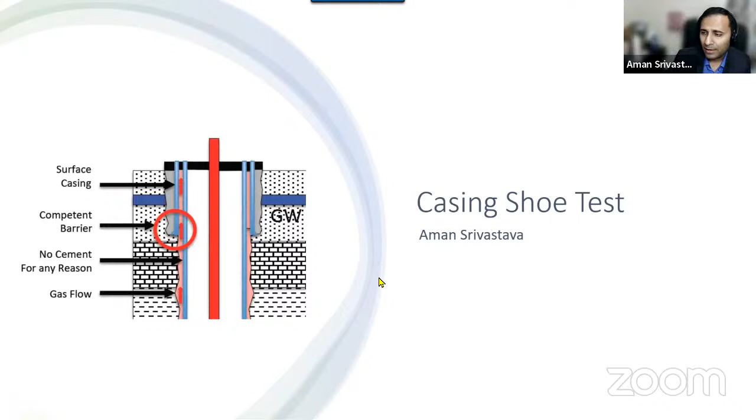Okay, so casing shoe test. The way I'm going to do this entire thing today may take like 30-40 minutes, I think. I have slides here. I'll be going over this agenda, but I don't really care about the agenda because I'll be walking you through how we do a shoe test, what is the reason, and what are the things involved in it. And I'll be doodling along as I go, on the slide and on one of my OneNotes as well. So let's start with this.

Casing shoe test. Now assume that you guys have been having this series of lectures where you must already be familiar with the cementing and casing terms that we are using. Now, what is a shoe test? Before we go toward the shoe test, we first need to understand what is a shoe, why do we test, and what is a shoe test. So what is a shoe? Here is the casing shoe, what you see on the left-hand side.

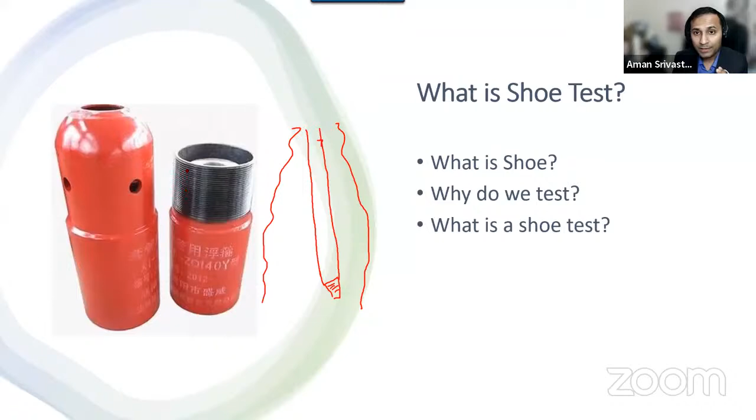Then what's the point of having this? I mean, if you drilled a hole like this and you are told to lower an open-ended drill pipe into it, that's totally fine. You can run it open-ended, you can have threads at the bottom, and nobody cares. But why do we add this casing shoe at the bottom? There are mainly two reasons why we do this. Number one is this has an NRV at the bottom.

Sorry, I'll write it here. NRV, that means non-return valve. So it allows you to flow anything into the casing and outwards into the open hole, but it would not allow you to pump it backwards. So that's the first reason of why you have this casing shoe.

The second is you can see this is a rounded bottom. Now, whenever you drill a hole, you might be drilling a hole, let's say 17.5 inch, and the casing you lower is a 13.38 inch casing, which is quite big. So if you have such a big steel pipe going in, which is extremely stiff in nature, it is very likely that these threads or the end of this pipe may get lodged on the side of the open hole that you have drilled.

So that's why we put a casing shoe at the bottom, which is rounded in nature, which kind of guides your entire casing all the way to the bottom. So if there are tiny ledges or bumps, you just smoother through it. It slides through the entire hole. Now you have this rounded thing right here, and you have an NRV right here.

Now there is another float collar as well. We put it up here. We call it a float collar, which is shown right here. And it also has an NRV in it. And the one or two casing joints between your casing shoe and the float collar are called the shoe track.

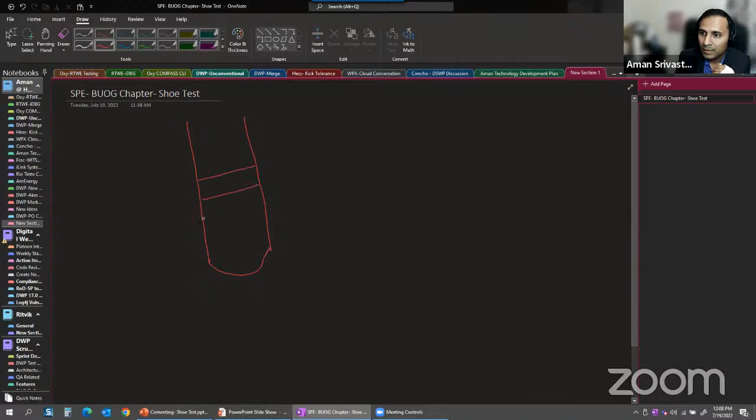So if I draw, let me move here. This is much better now. So if I draw a casing string, you will have a casing shoe at the bottom, and then you will have a float collar, one or two joints above. And this part is called the shoe track. This is the float collar. This is the casing shoe.

Now, when you lower this casing shoe into the hole, let's say I'm going to draw a hole, and I'm going to draw a vertical hole just for simplicity's sake. We take a casing, we come down all the way to here. This is the shoe. All right, so we have drilled till this depth, and we are like 1 or 2 feet above the bottom, and we have this thing right here.

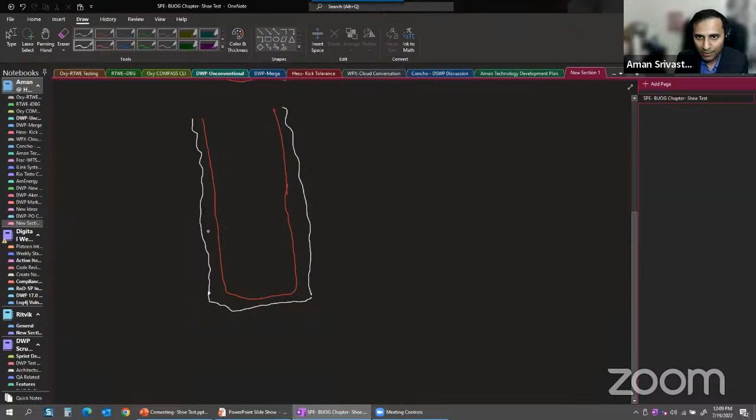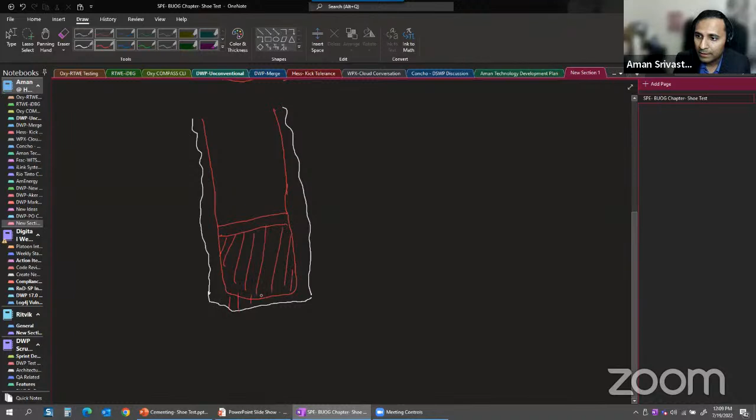Now, as soon as I reach the bottom, I'm going to start circulating so that I am sure that the mud is conditioned before I cement it. For cementation, I think that it is part of a series. If I'm not wrong, you guys have lectures on how primary cementation happens. But anyway, we drop plugs and the cement is filled in the shoe track and in the entire open hole till whatever depth we want.

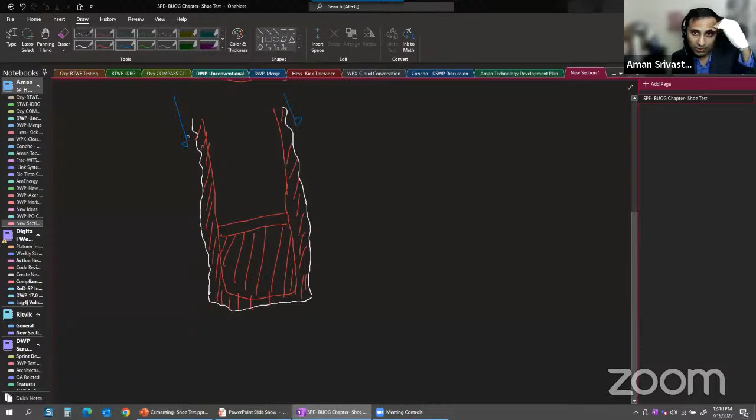So it could be all the way to the surface, or it could be till isolating any zone of interest that you want. Or if you have a previous casing right before that, you can actually cement only to that casing level. You don't need to bring it to the surface. Well, that's fine. We are talking about shoe track here. So I have my casing in the hole. My casing has been cemented.

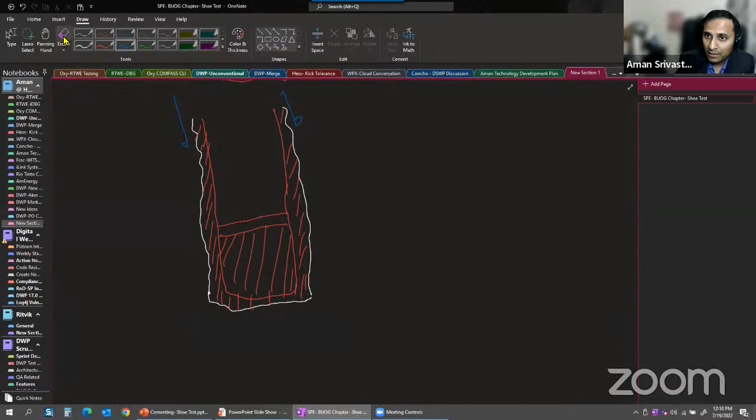Now, why do I need to test this shoe? What's the point of testing this shoe? Now I know this is the shoe, but what's the point? The point is that I'm going to start drilling out this entire thing. So if I take an eraser and I start drilling, I drill out the float collar. Now these all things are drillable. So what you saw in this slideshow, obviously not this metal part, but you can drive a drill bit through this entire float collar and this entire shoe.

These are usually made of cement, a little bit reinforced cement, and plastics. And you can even see them when they come to the surface. You can see big pieces of plastics coming to the surface, and these are drillable materials. So you can drill them with just a regular bit. So we're going to drill out this shoe, and we're going to drill out this part.

Now my entire casing is open, and this part now, which is right at the communication of the casing and this last formation that I drilled, is called the shoe. Now my new hole is smaller in size. Obviously, it's smaller in size like this. So this will continue to be called a shoe.

And you will hear this term very commonly used in the drilling industry whenever you guys work as drilling engineers: are we above the shoe? Above the shoe means, is your drill bit inside this shoe, which means your drill bit is inside the casing. Because this is a casing, it's a solid steel pipe, so nothing will happen. You can keep it there for days, no damage done, you won't get stuck. But if you leave it here, you can get stuck.

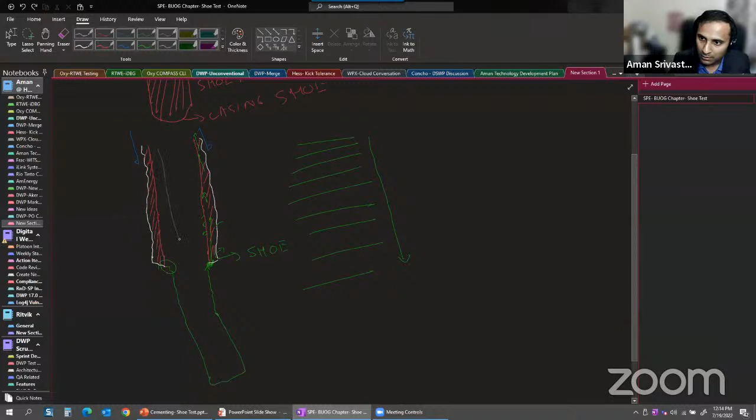All right. So now we know what the weakest link is. If you have a weakest link, you have already cemented that, so there's nothing more you can do about it. So let's test it out. Let's ensure that this weakest link is strong enough to hold us till we reach our next target depth. If I zoom out and draw this, till I reach this target depth, finish this up, and lower another joint of casing all the way to the bottom, with the casing shoe at the bottom again, and cement it all the way to the top.

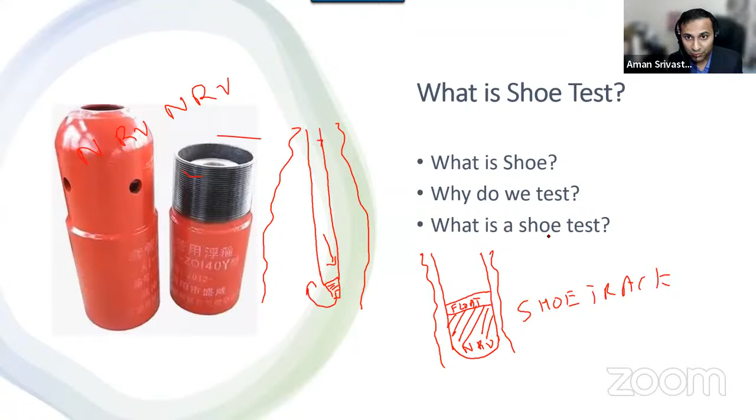Now I'm safe. Now I know that this is no longer the weakest link. The weakest link now becomes something else, the bottom part. So that is why it is important for us to test the shoe. Now the question comes in, what is a shoe test? So let's get to that question.

Now, what I'm showing you here, and I can share this slide with you, is literally the steps we take to conduct a shoe test. This is the step-by-step process we do at the rig site. And before I come to the question, why do we do the shoe test, I wanted to cover how you conduct a shoe test, so that later on you can see why I did this.

So if you're at the rig site and you get an order that we're going to conduct a shoe test, there are some pre-test preparations you have to do, and these things should be very clear to the drilling engineer, the rig site supervisor, the company man, or the tool pusher, whatever role you are playing. Number one, what is the test plan strategy? What are we going to test? Is it an FIT? Is it an LOT? I'll come to those points right after the slide. So ensure the test plan strategy is very solid before you even start with the test.

Ensure a blank P and V chart is available. Now, this could be something that you may not need, because nowadays any unit that you use, you have computers, they can plot everything for you immediately. So that's not required. But you know what? A pen and paper is much stronger than any computer in the world.

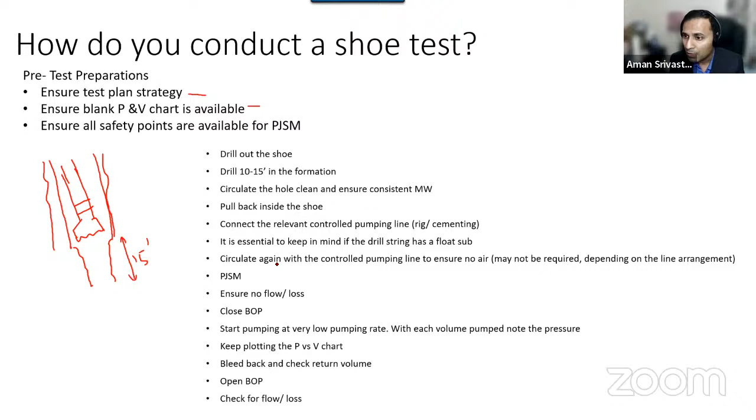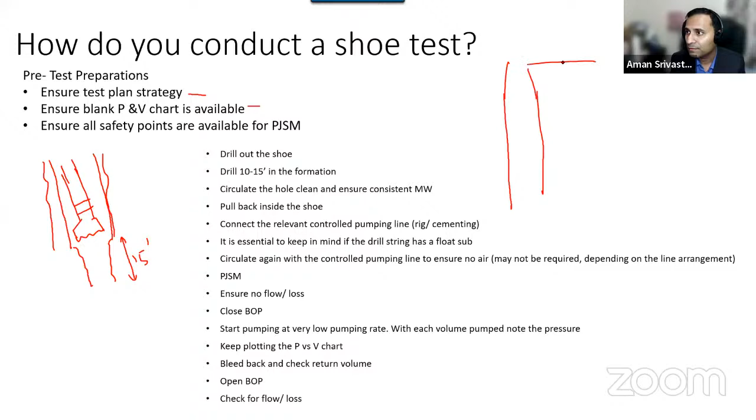It is essential to keep in mind if the drill string has a float sub. Now, this may not be relevant right now, but if your drill string has a float sub, you have to keep that in mind, because the pressure may not bleed if there's a float sub. You have to make sure you have bled off all the pressure. Anyway, circulate again with the control pumping line to ensure no air. So let's say this was your well that you drilled, and on the surface, you connected a pumping line. Earlier you had circulated and made sure no air is in here, but you have to make sure there is no air here as well.

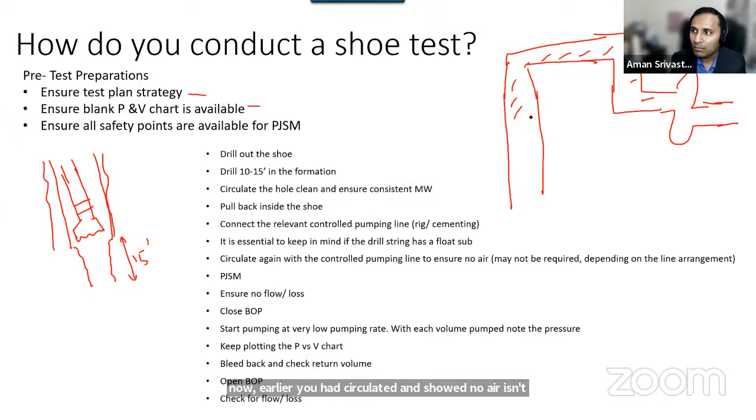Now, why is making sure there is no air in the system so important? It is because air is compressible. Air is extremely compressible. Actually, all fluids are compressible, but air is extremely compressible as compared to the drilling fluid that you are using. So if you have an air bubble, it will start getting compressed and you would not get a good result. So it's very important to know that there's no air in the system, but this depends on the line arrangement and how you have positioned it. So the pumps can sometimes control if there is any air or not.

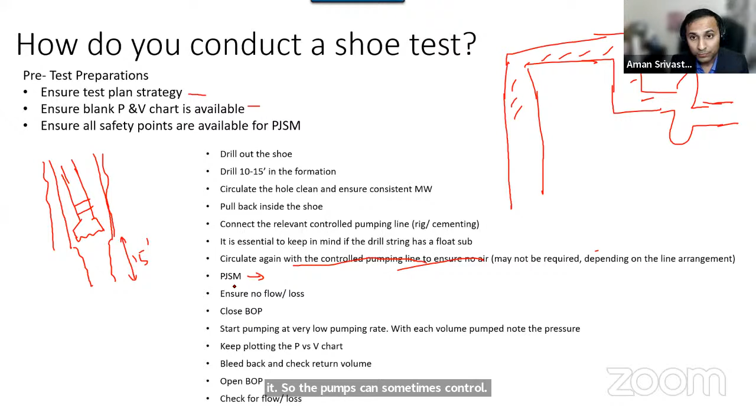You do a PJSM, like I said, pre-job safety meeting. At this point of time, you tell everyone what you're going to do. You ensure there is no flow. The well is not under self flow. You're not getting a kick, and you're not losing any fluid. The well is completely stable. You close the BOP. This is extremely important. You had a well, you are going to close the BOP.

So now you have shut down the BOP. The well is completely shut in. And now you start pumping at a very low pumping rate, very small pumping rate. And with each volume pumped, note the pressure. So again, like I said, you have a chart available with you.

You were at 0.0. You pumped, say, 0.1 barrels. You got some pressure. 0.2 barrels, you got some pressure. 0.3 barrels, you got some pressure. 0.4 barrels, you got some pressure. You keep on plotting that, and ensure that you're plotting this PV chart as you are pumping. You cannot wait for the test to get over and then plot this. It has to go on simultaneously.

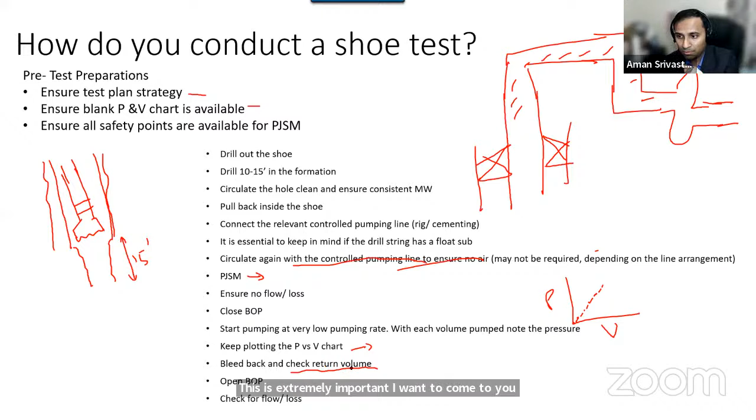You keep plotting the PV chart, you keep pumping, and once you have reached the success point where you say, okay, my test is done, you're going to bleed back the entire pressure and check the return volume. This is extremely important. I want to come to why this is so important. You have to check how much volume of fluid comes back to you. You open the BOP and then you check for flow and loss. You resume your operations. Easy peasy.

I know there's a lot of steps here, but actually all you're doing is you shut in the well, you pump some fluid into it, and you note down the P and V plot. You stop pumping, you bleed back, you start your drilling process. It's usually very smooth. It's usually very easy to do.

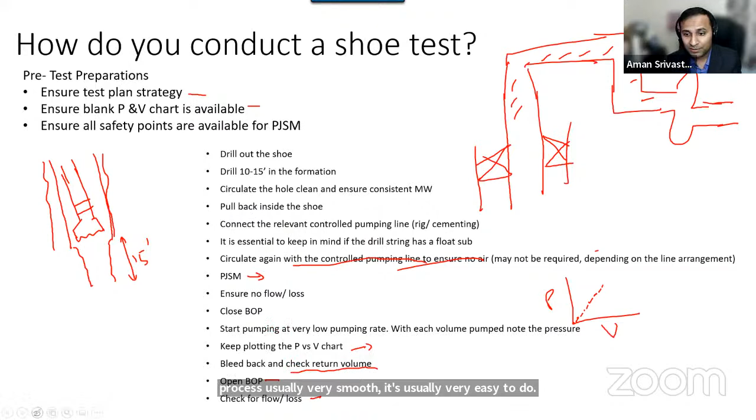Now, why are we doing this? You know how to do it, but the question comes, why did I do all these steps? So if you are on the rig side and you are plotting pressure versus volume, so you have volume right here and pressure right here. If you're plotting these two as you are pumping, like I said, you will start from 0, 0, and you will start plotting this line as you're going up. Now, look at this line. It's perfectly straight going up.

Right now, what is happening is you are doing a limit test. Some people call it limit test, or actually you are performing an FIT. FIT means formation integrity test. Because whatever volume you pump, the formation holds that volume, and the pressure starts increasing in the entire system, in the entire wellbore. So you are getting a formation integrity.

What is the integrity of a formation? How strong it can hold that pressure. It could be 200, 300, 400, 500 PSI. And that is where the formation strength is holding up for you. If you keep on pumping, there will be a point of time where it will start deviating. So this was supposed to be a straight line, which would have continued, but then you started deviating. This is the leak off test.

And unless you are plotting live, as you are pumping, you would never know when you reached LOT because you would just keep on pumping. That's why I told you it is very important to keep a P and V chart in front of you or keep looking at the computer screen to see at what point you deviated from that straight line. So right here, we deviated from the straight line. This is the LOT point, leak off test.

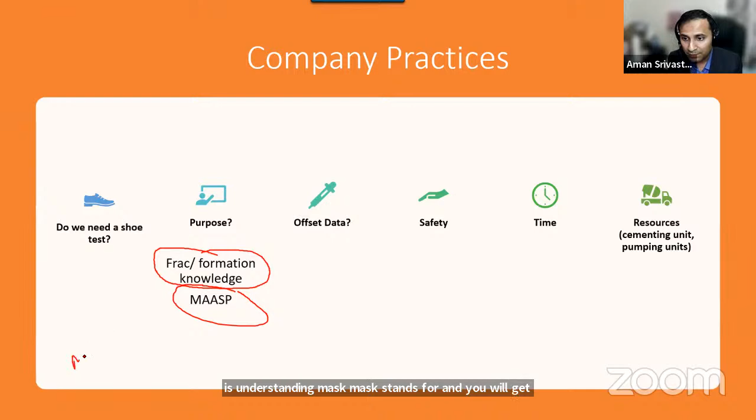MAASP stands for, and you will get this when you do any well control course, maximum allowable, sorry, my poor handwriting, annular surface pressure. Maximum allowable annular surface pressure. So what does it mean?

If I'm drilling right here, if I drilled this hole and I lowered a casing till this point, and I performed a shoe test, let's say 5,000 feet, I was using a mud weight of 9 ppg. I'm using API units here. Please pardon me if you're not familiar with it, but this is what I'm familiar with. So let's say I performed an LOT test, and I saw the point at which it started deviating was, let's say, 500 psi.

Okay, so I have got 3 input points: 5,000 feet vertical depth. This is the TVD. It's very important, note TVD. 9.0 ppg, that's the mud weight at which I conducted my shoe test, and 500 psi is my LOT value, leak off value. What does it tell me? It tells me that the bottom hole pressure right at the shoe when I was conducting the test was

0.052 times 5,000 times 9.0 plus 500. This is the hydrostatic pressure of the mud that was acting on it, and then plus 500. Okay. If I calculate this, should be quick enough. 0.052 times 5,000 times 9.0, 2340 psi, and let's simply add 500 to it, and 2840 psi. So we have 2840 psi of bottom hole pressure that was acting on this shoe, which tells me that this shoe can withstand a total bottom hole pressure of 2840.

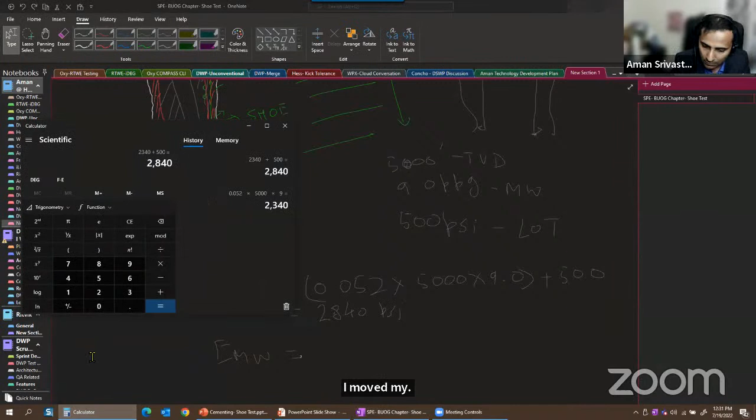What is the equivalent mud weight for that? What does it mean in mud weight? So it means that, oh, I'm sorry, I moved my, okay, there it is. So it means, 2840 divided by 0.052 divided by 5,000, 10.92 ppg of mud. So this means that my shoe can withstand a total mud weight of 10.92 ppg.

Now, this is very important for me, and this 500 psi is very important for me. It tells me that if I continue to drill this coming up section with the same mud weight, 9.0 ppg, my maximum allowable surface pressure is 500 psi. Whenever I'm recording the surface pressure, it should not go above 500 psi in the annulus. And why is it helpful?

Because if there is a kick, if there is a gas kick in the well I'm drilling, and the gas bubble is going upwards, the pressure on the surface will rise. And if it goes above 500 psi, I'm going to have a leak off at the shoe, which can lead to, you saw that, fracture breakdown. It can lead to creating a fracture. It can lead to propagating a fracture. You can end up having an internal blowout condition, which is not good. So it is very important for a drilling engineer to know what is your maximum allowable surface pressure. That's point number one. And it's also important for us to understand what is the equivalent mud weight, 10.92.

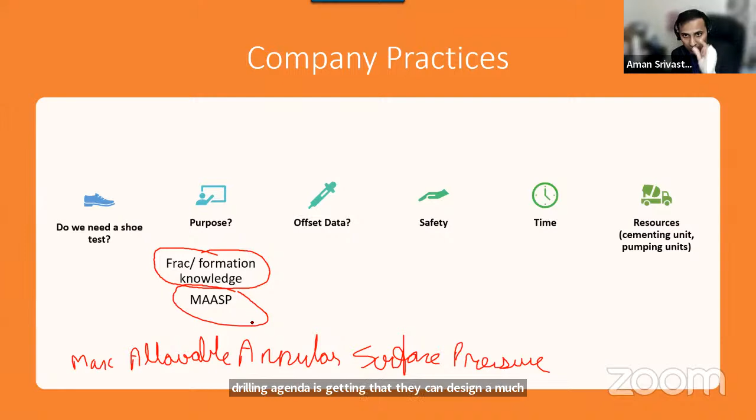Then comes offset data. You can ask the question that, hey, okay, I'm going to design it and I understand that you need frac formation and I need to know MAASP. But we have offset data. We have a well that was drilled maybe 100 feet away from this well. Why can't we take those FIT LOT values? You can. That's not a problem. You can take those values.

But there can be questions raised on it because nobody is seeing how the formation is behaving down there. You don't know what kind of overburden pressure, what kind of undulations you have in the formation. So it can get a little tricky just blindly following the offset data, but you can copy the offset data. That's not a problem. If you don't have any source of information, go for offset data. That's always allowed. Safety always goes here, MAASP value. So you need to know what is your maximum allowable annular surface pressure, because that's the safety thing. So the company practice can be, we want to be safe. So as much as possible, do the LOT, do the FIT values.

Now there comes time. Do you have time to do that? I know it sounds very silly. I've just told you the importance of doing a shoe test. Why is it so important? Why is it so critical? It's safety. But what about the time? It does involve time. It can take you maybe 1 to 2 hours to perform the shoe test, depending on how good or how fast the crew is. But in an offshore scenario where a drilling rig is charging $1.5 million per day, time is of the essence.

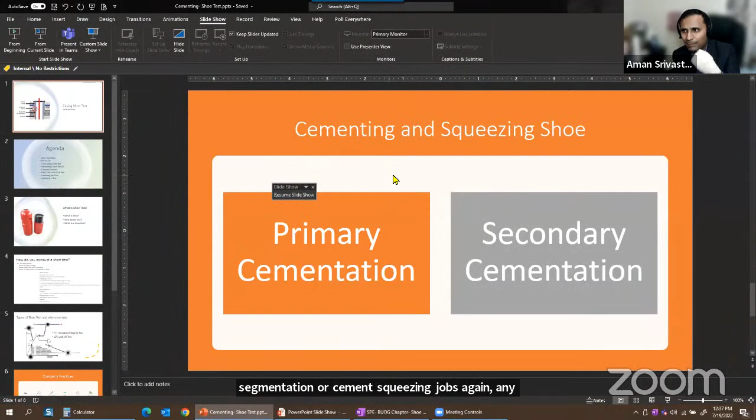You will do what is called a secondary cementation or cement squeezing job. Any cementation which happens apart from primary cementation is secondary cementation. So cement squeezing is secondary cementation. But trust me on this, secondary cementation, squeezing cement, they don't have a very good success rate. They don't.

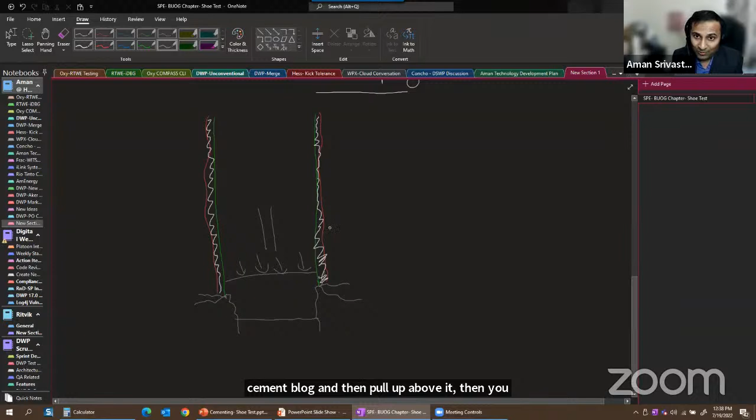So your best bet is you do this primary cementation in the best way possible, having the best quality of cement, having the tests done by the cementing lab again and again. Make sure you have done the right tests, right analysis, right mud weight, because secondary cementation may work. You can land a cement plug, pull up above it, and then pressurize above it. It may work, it may not work. That's always questionable. So the best way to do it is primary cementation.

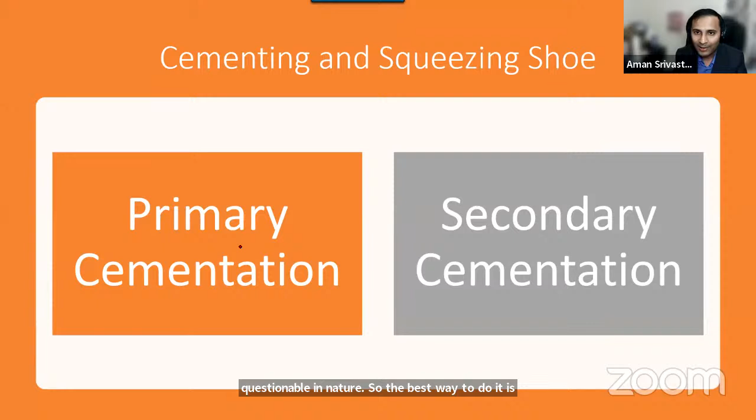I know a guy who even said secondary cementation works only in books, it never works in real life. You want your shoe to behave best, do a good primary cementation, do good planning on primary cementation. This is contingency, always contingency. Don't rely on this. But I'm not saying people don't do it. People do it very often. Sometimes there's no other option, so you will end up doing some secondary cementation. But again, the success rate might be a little less.

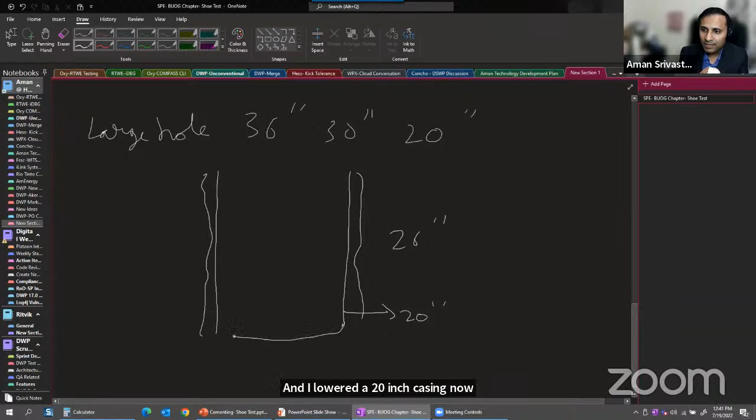And so like 36-inch or 30-inch or 20-inch casing. So I'm gonna make a big hole here, and you have a casing that goes down. So let's say I drilled a 26-inch hole and I lowered a 20-inch casing. Now, as per the primary cementation rules, what you're going to do is you will be having a float collar right here, and you will pump plugs, a bottom plug and a top plug.

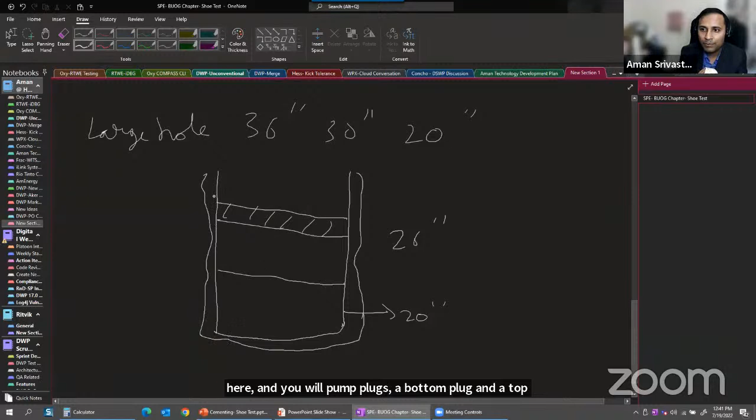And the plug will travel down and it will squeeze the cement and then squeeze it upwards, and this plug kind of like pushes all the cement down. It finally rests on top of the float collar, and you will have cement then filled out here and in the annulus. So it's kind of like a plunger, it pushes it downwards.

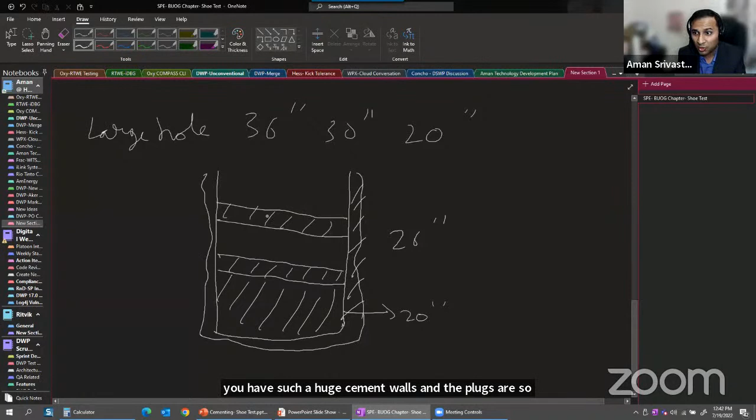But what happens with large casing is you have such a huge cement volume and the plugs are so big that sometimes it's not easy to get a good plug wiper job. This plug acts like a wiper, you know, you're wiping water off of your bathroom floor, so you squeeze it. But these plugs are huge. 20 inches is a big size.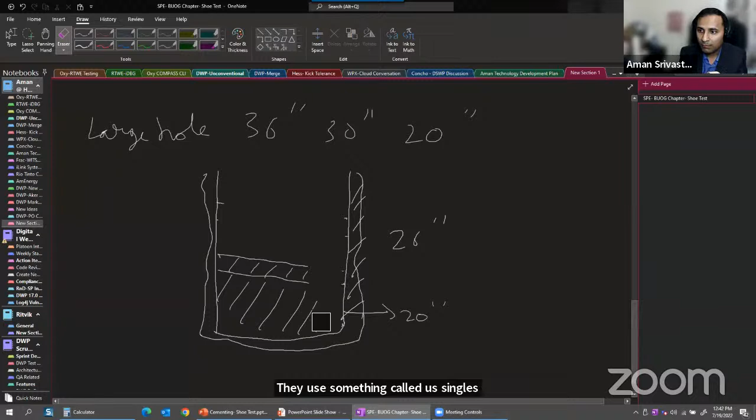So what they do, instead of going like this, they use something that's called a stinger string. And your cement shoe at the bottom is also special in that case. You cannot just use any cement shoe. It has something which is called a stinger or stab stinger, and you lower a drill pipe, just any regular drill pipe with a stinger at bottom. So this stinger is kind of like a funnel-shaped kind of thing like this.

And what it does is, let me see if I can do a little fancy thing here. All right, so it's going to go down and fit itself in, stab itself into that small protrusion this cement shoe already has. So as it goes down, it has rubber seals around it and it seals itself.

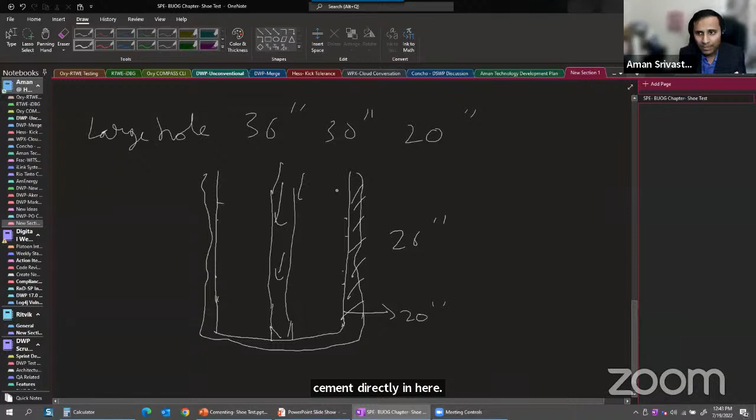Now you can pump cement directly in here into the drill string. Just pump the cement down this drill string. You don't need a wiper. You just keep pumping it, and it's going to come directly into the open hole and up into the annulus. And once you're done with it, you pull on the stinger because it's rubber. You just pull on the stinger and it comes loose. You flush the drill pipe with water so that you don't leave any cement in there, and that's it.

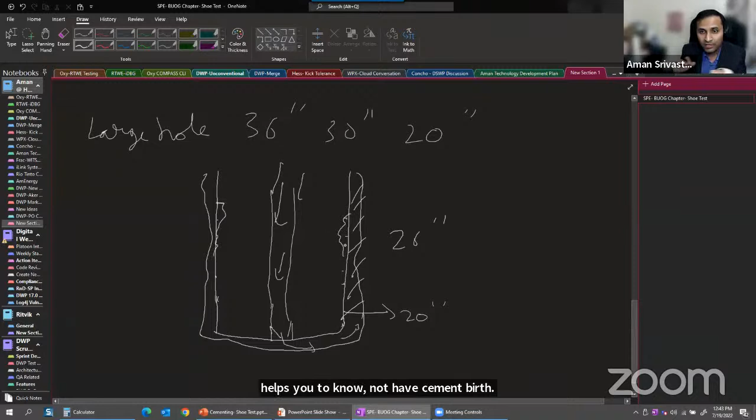So it's a faster job. It's much quicker in nature, and it helps you to not have cement bursts, some cement left in the casing, and it allows you to do a clean job in such big casing sizes. That's what a cement stinger is. I hope that answers the question.

The other question is, what is the most common problem related to the casing shoe? It's an interesting question. Man, you guys have tough questions. Okay. What is the most common problem? The most common problem, I would say, is cement shoe washing out. I think that would be the most common problem. So washing out means that you have a hole right here.

Let's say you have a casing and you landed the casing and you were drilling another hole right here. So as you start taking the drill bit out in the open hole formation, many times the bit starts wobbling around because it suddenly gets a free rein to jumble around here and there. So instead of getting a smooth hole like this, you sometimes end up getting an enlarged hole like this at the shoe. The cement shoe washes out.

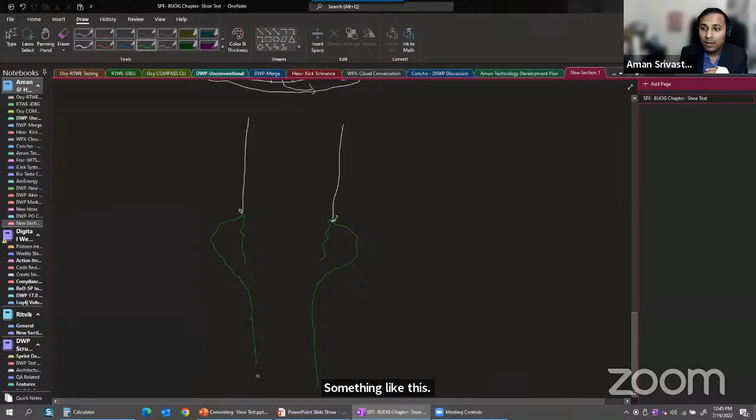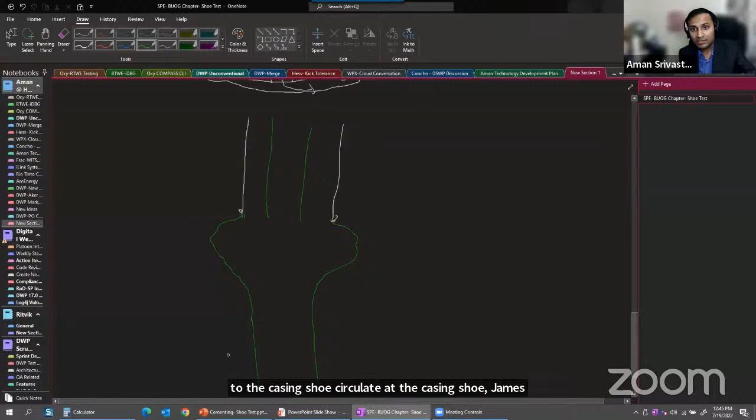What people also do sometimes is, if it is a deep well and you have changed a mud weight, they do it in stages. They will bring the drill string to the casing shoe, circulate at the casing shoe, change the mud weight, and then go down and then change again. They do it in stages and stuff like that. This unnecessary or extra circulation also can cause washout.

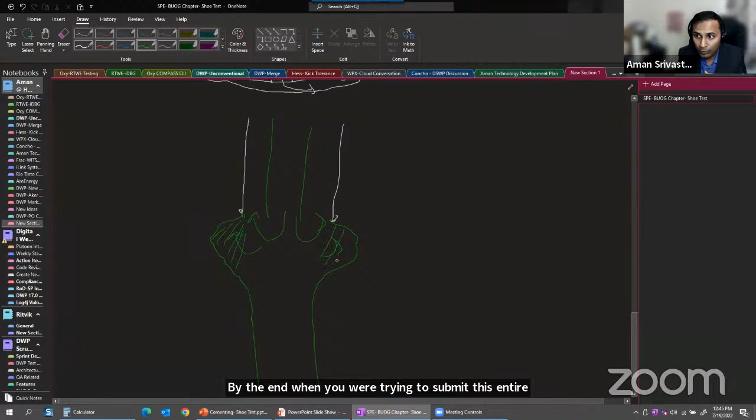So this increases the hole size, which can create ledges in your hole, which can create unnecessary cuttings flowing in, which can, by the end, when you are trying to cement this entire thing, take off your volume off of your cement, because a lot of, hey, my voice is not clear.

No, it's quite clear. Okay, so I think the problem is with my friend Mohammed. I think it could be from your side. I'm sorry about that.

So this can lead to cement volume issues. I'm not able to recall right now any other problem, but this, I guess, would be the most common problem you would see against the casing shoe, washing out.

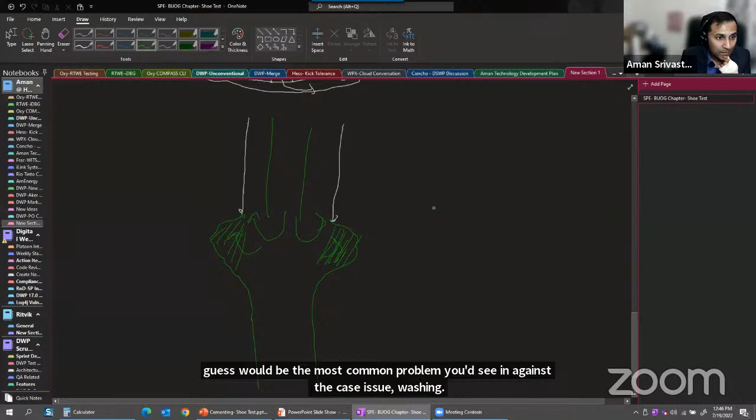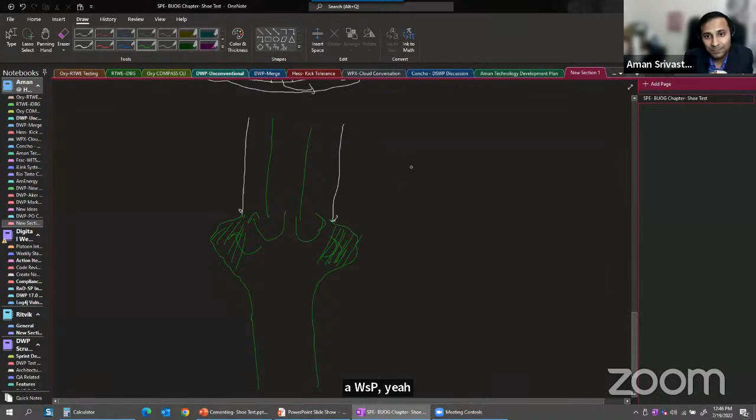All right, I see a couple more questions. The other is, is LOT the only way to know the accurate value of MAASP? Yeah, it's MAASP. I know it's very confusing. It's not SSP, it's MAASP. And can we use FIT to predict the MAASP? Yes, you can. LOT is not the only way.

Let's say you were told that the LOT is expected to come at 14 ppg. Usually you will get this information from offset well data. So you're at the rig site, you're testing it, and you know the LOT will come at 14 ppg. And you kept on pumping, and you are now at 14.5 ppg. And it's still a straight line. You did not see any deviation.

You and your boss decide, you know what, I'm going to call it off. I don't want to fracture anything. I don't want to go above what is intended. So you call it off. So now this is an FIT. The thing is, you don't know what will happen after 14.5. So why do you want to even risk your MAASP going above 14.5 ppg?

So it's fine to say that my MAASP is limited to an FIT of 14.5 ppg only. And that is what I'm stating. I'm not going above that. If somebody comes and says, hey, was that LOT? You can say, no, that was an FIT value, but it's an unknown for me. So I cannot go above that. That's totally fine. It's never wrong to be safe.

There's a question, I think: what determines the pressure in this test? I don't get the question. Can you please? I think he means what determines the pressure in such a test. Excellent question. What determines the pressure is actually the integrity of... All right, let me draw better. My drawing is still bad.

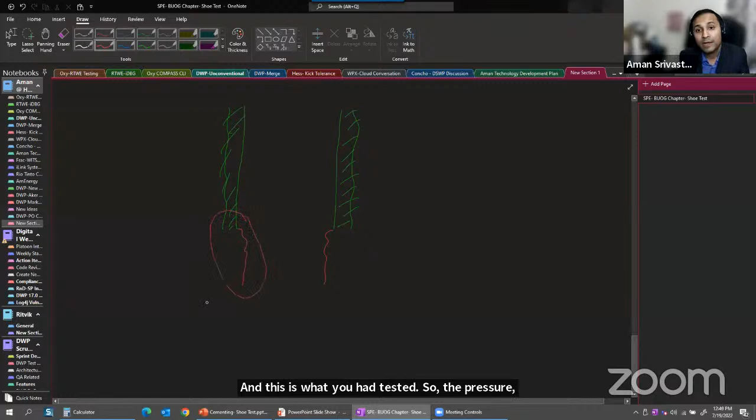So I'm going to draw an enlarged part of the casing shoe. So you have your casing shoe here. And you had drilled a little bit of formation. And this is what you had tested. So the pressure actually depends on this part that I've just highlighted. The 14, 15 feet of opened-up formation and this cement, and the bond it is making with the formation right here. This is what determines the pressure.

If it is rock solid, your cement has good bonding with your formation, you're going to get a bang-on test. You're going to get a good test. You will have good LOT values. Remember, with LOT, what is happening is in the formation, not in the cement. We are not doing anything in the cement. The cement has already been tested to a lot higher compressive strength.

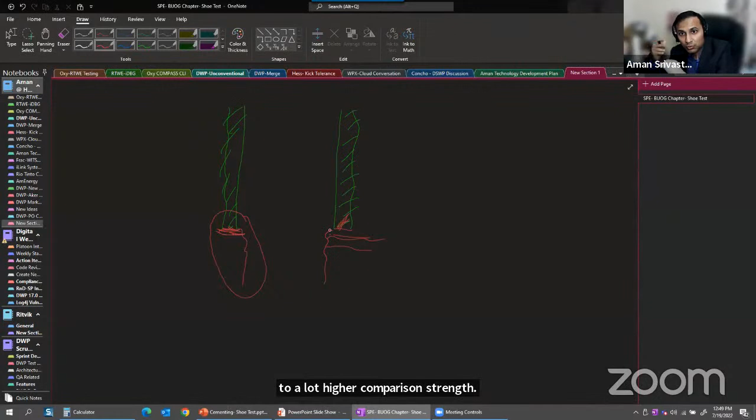So don't think that when you're pressurizing, it's the cement which you are channeling through. No, it's actually the formation; you're trying to find out the weakest link, the topmost formation, when it will leak off. So that formation and the bond with the cement is going to decide how good your LOT is.

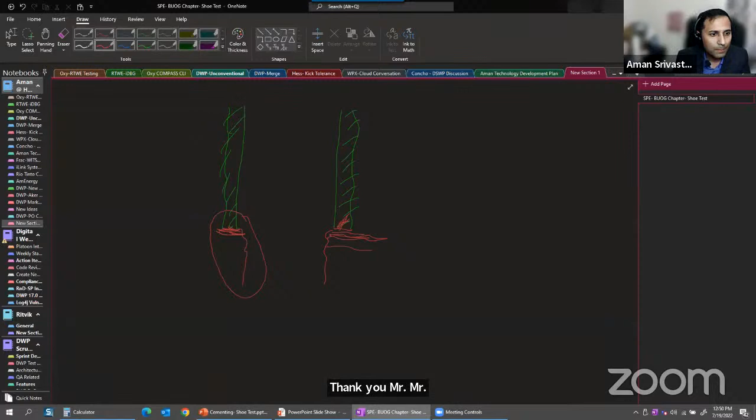Okay. Thank you, Mr. Aman. Yeah, I think there was a hand raised. Yeah, I suppose. You just lowered it down. Dhya, if I'm saying the name right. Yeah, here it is. Please unmute. Okay, the mic is yours, Mr. Dhya. Okay, thanks, boss. Thank you very much, Aman, for the valuable information that you shared with us in your lecture.

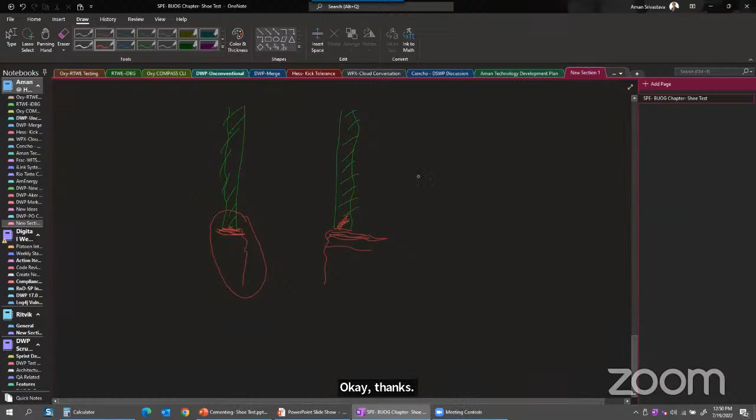So just a question that I have: could you please clarify the difference between the extended leak-off test and the normal leak-off test, XLOT versus LOT? Thanks. That's the part where, I'll be very honest, even I am not very good at.

So that's where extended LOT comes in, where you are not just looking at the first point of departure from the straight line. You're also looking at parts where it may even have another breakdown or another opening up of the fracture, which will mark your extended LOT.

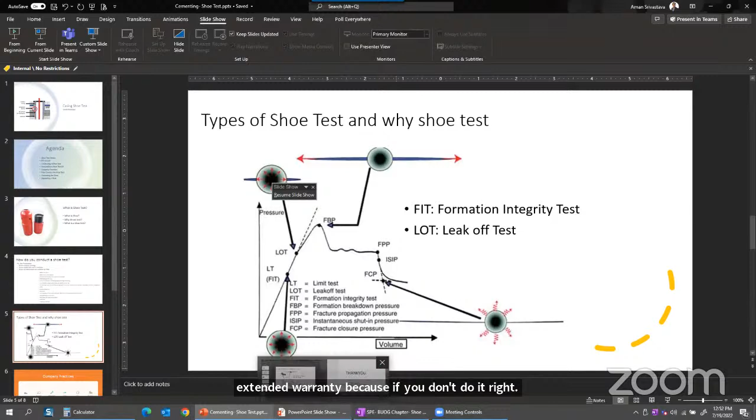I'll be very honest. In my personal experience, I don't have much experience working on extended LOTs. They are conducted at a very controlled rate. They are conducted at very controlled locations. You cannot just go and say, okay, I'm going to do extended LOTs from now on. No, you have to consult with the geologist if it is even okay to conduct an extended LOT, because if you don't do it right, you can end up breaking the formations completely, and that would not be good for you. Okay. So yeah, sorry, I don't have a perfect answer for you, but it's a limited thing that you do.

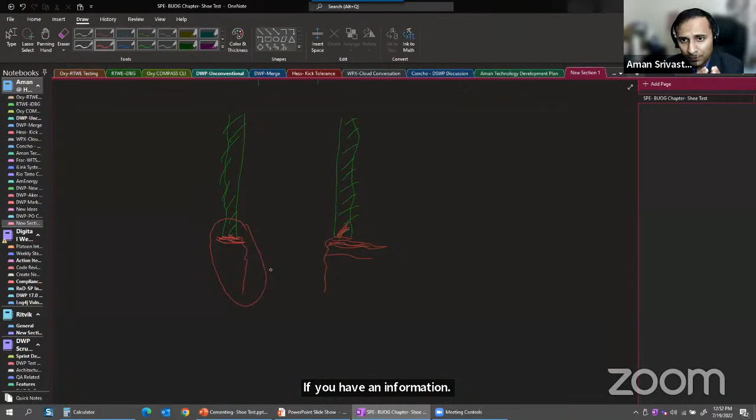Okay, but do you have any idea whether the data that I'll get from the extended LOT will be more accurate, or how it could be useful for our work? So from the drilling point of view, or from the general petroleum engineering point of view? Okay, in both views.

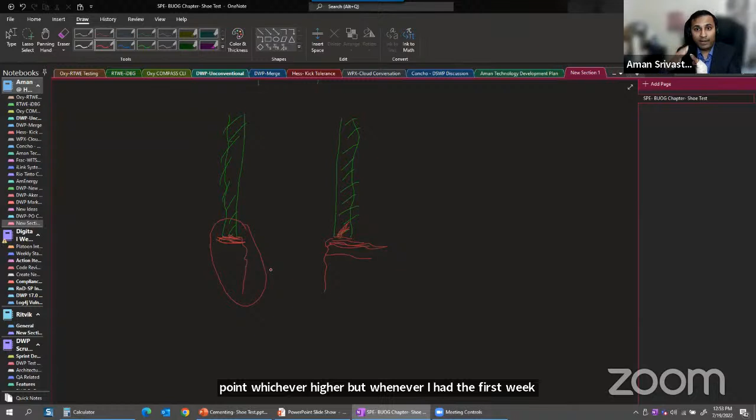So from the drilling point of view, I would say if we did an extended LOT, it helps me understand the first leak off point. Whenever I had the first leak off, that is my max. I would not go above that. But if I went on an extended, I know that there is a flexibility in the formation, that I can go even above that. So if there is a worst case scenario where I have to extend the annular surface pressure above the LOT value, I know I can go above that because I have already done an extended LOT test. So that's point number one, from the drilling point of view.

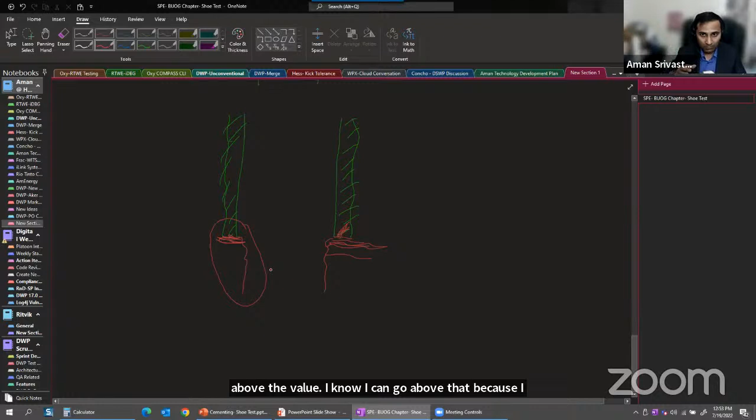From the geophysical or geology point of view, this again is for understanding the flexibility or the integrity of that formation. There are correlations available that allow you to understand, if you have an LOT value of 500 psi, how you can extrapolate what will be the value for FBP or the FPP. There are empirical correlations available. There are logarithmic correlations available based on the petrophysical information.

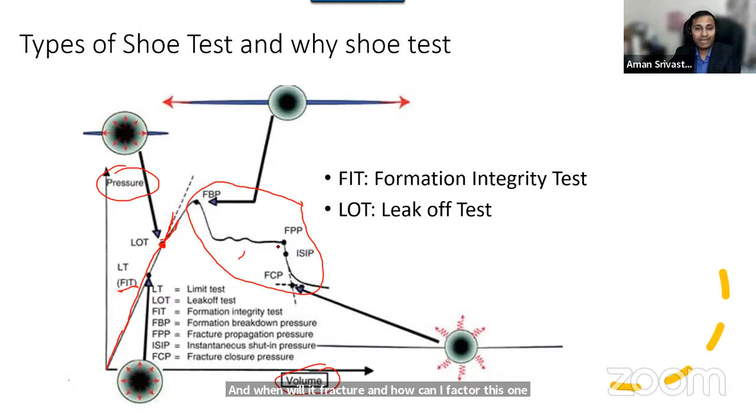So if you did an extended LOT test, there are again empirical correlations available for that particular type of formation, which help you understand how this formation will behave, when it will fracture, and how I can fracture this formation if I have to for better oil production. Okay, thank you very much. Any further questions?